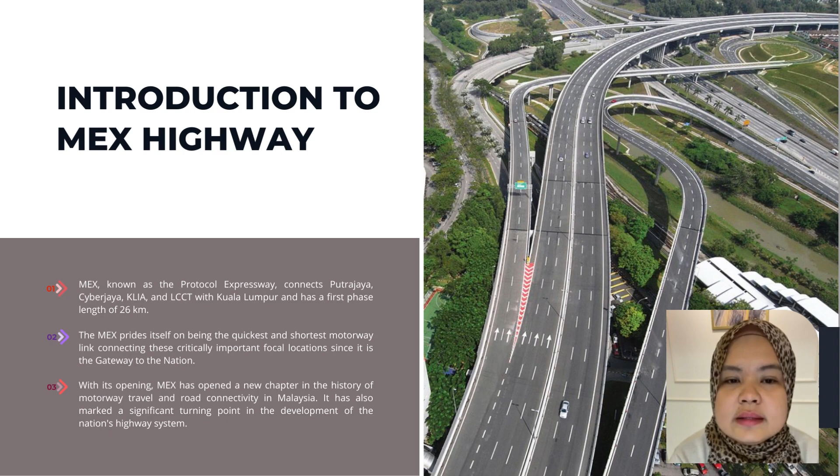The Maju Expressway MEX, formerly known as Kuala Lumpur to Putrajaya Expressway KLPE, and KL to KLIA Dedicated Expressway, is an expressway network in Klang Valley, Malaysia. The 26 km long expressway links the Kuala Lumpur city centre with the Kuala Lumpur International Airport KLIA in Sepang, Selangor. The expressway is a backbone of the Multimedia Super Corridor MSC area. The Kilometer Zero is located at Kampung Pandan Interchange, Kuala Lumpur, just outside the Tun Razak Exchange.

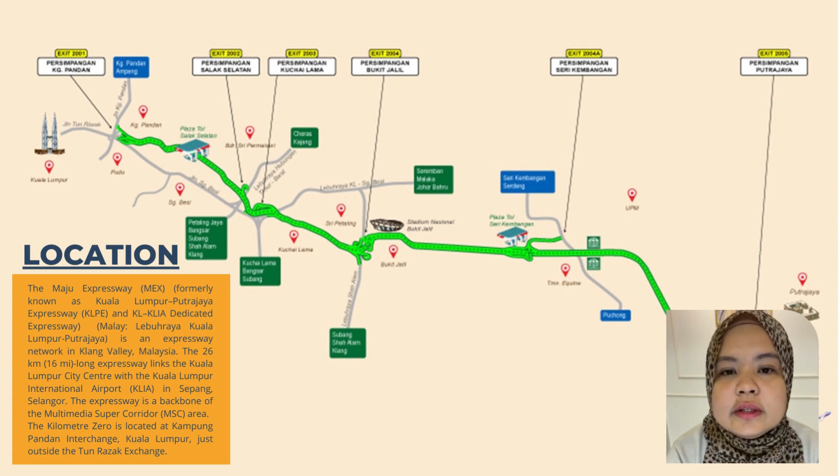Based on Edge report, EX1 Capital Berhad has announced the completion of its restructuring exercise via the issuance of Islamic Medium Term Notes MTN of up to RM 1.13 billion in nominal value.

Next, MEX is operated by Maju Expressway Sdn Berhad MESB, the concessionaire that has been awarded a 33-year concession to operate the dual carriageway commencing from 6 December 2004. Maju Expressway Sdn Berhad is a single-purpose company that has the concession given by the government to design, construct, maintain, operate, and manage the 26 km Maju Expressway.

MESB is a subsidiary of MEX Capital Berhad, which in turn is a wholly owned subsidiary company to Maju Holdings Sdn Berhad.

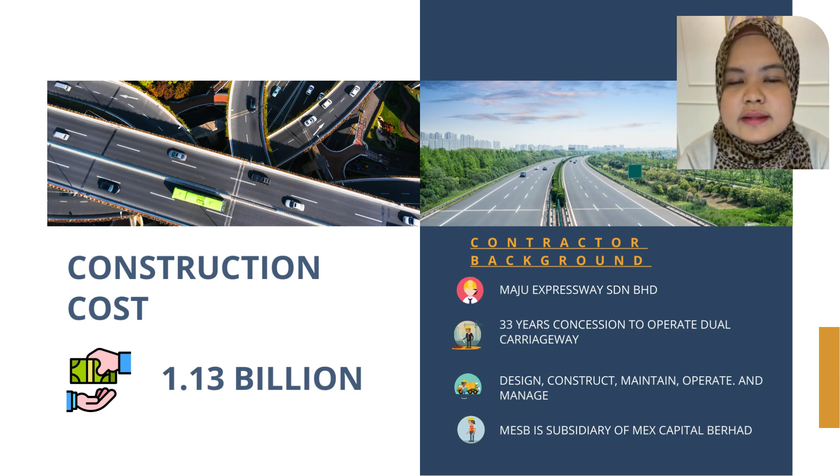Let us go first for the unique features constructed in MEX Highway. Firstly, there is a 120 meter steel box girder that was fabricated and launched onto the crosshead at Ramp 1 at Kampung Pandan roundabout to facilitate the mitigation of heavy traffic and to overcome the restricted space at the construction site.

Secondly, a 10 meter height bridge was constructed for crossing at the Bukit Jalil interchange over the Kesas Highway. Thirdly, the expressway has nearly 10 km of elevated viaducts over highly congested urban areas. Fourthly, in order to prevent vehicles from any precarious mishap, concrete parapets with an extended height of 2 meters were constructed in certain populated areas. And lastly, sound barriers were installed where the roads are along residential areas as an alternative to contain vehicle noise within the expressway.

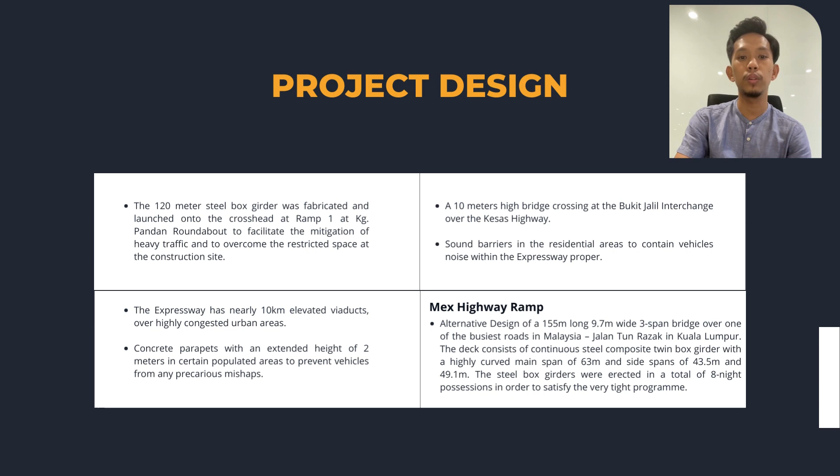Next, we will see how MEX construction technology reduces highway noise in built-up areas. The Maju Expressway MEX linking Kuala Lumpur with Putrajaya, as in many urban highways, cuts across highly built-up residential areas. This can potentially result in unacceptable noise to residents if left unaddressed. The design team, who were involved in the design development of the MEX Highway, found that there were several residential locations of concern.

One of the locations is where the highway runs over an existing local road in Seri Petaling. From noise modelling, the design team were able to design noise barriers to ensure that the MEX does not contribute to existing noise in the areas below. As such, noise from the MEX highway was rendered inaudible to residential houses or high-rise buildings located adjacent to the highway. Noise barriers can only be effective as long as there is no line of sight to the highway below.

In this instance, additional measures were implemented with low noise porous asphalt roads as compared to conventional bitumen, and certainly avoiding concrete pavements. Noise intrusion into bedrooms of affected apartments at different floors were also examined for traffic noise intrusion via the glazing.

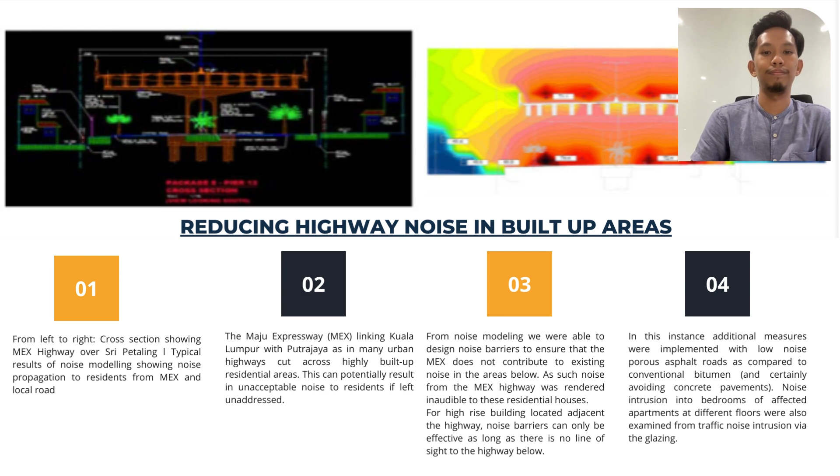Before I pass this session to my friend Akmal, let us see the project summary for MEX Highway.

The Lebuh Putrajaya KLIA MEX Highway is an 18-km 3-lane dual carriageway that will commence at Putrajaya Interchange and merge onto the existing Lebuh KLIA in Sepang. Putrajaya Interchange, with a trumpet configuration, will be designed for connectivity to the existing Putrajaya Toll Plaza.

From the outset, MESB intended that MEX should afford the highest level of security and comfort to users of the expressway. MESB has installed a host of safety features on the expressway, including a state-of-the-art traffic control and surveillance system (TCSS) that comprises vehicle detectors and closed-circuit television (CCTV) cameras.

The TCSS Center has a direct link to local emergency authorities to facilitate immediate assistance in the event of an emergency. It can also supply the media with the current status of traffic on MEX for immediate dissemination to the public. Other safety features are emergency telephones located every 2 km at both sides, and variable message signs along MEX.

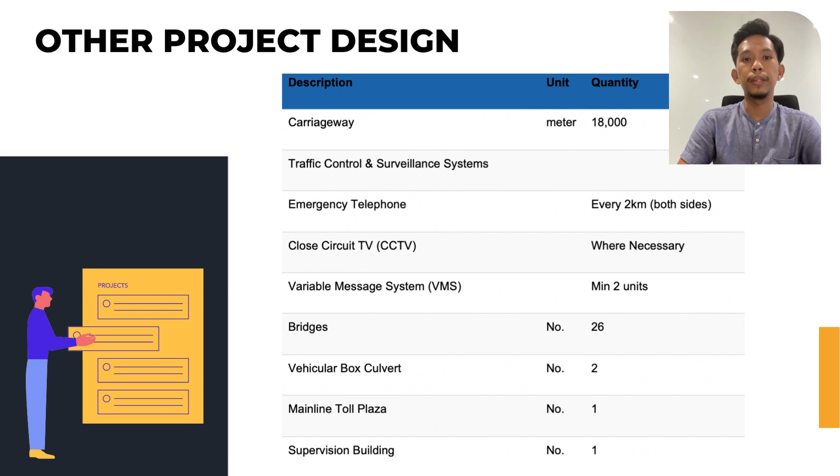I think that's all for my part, and I pass the presentation session to my friend Akmal. Thank you, Ruhaizi, on the explanation of project design.

Assalamualaikum. My name is Muhammad Akmal Beronsli. I would like to continue on the next topic, which is about construction technology used in the MEX Highway.

Firstly, the construction technology used is mechanized bridge construction. By using specialized erection equipment, the construction of beams to connect the highway is very crucial. In this project, precast beams are used and interlocked with precast columns.

Instead of using conventional methods of construction such as reinforcement bars, this project uses pre-stressed concrete, a system with benefits such as longer spans of concrete, reduced thickness of concrete, and faster construction method. This method obviously improves the structure and reduces the maintenance cost of the structure in the future.

Moving on to another construction technology, the movable scaffolding system, or MSS. This system eases the movement of concrete, which comes in segments, and is used to place the concrete on high columns, making it safer for the people working on site.

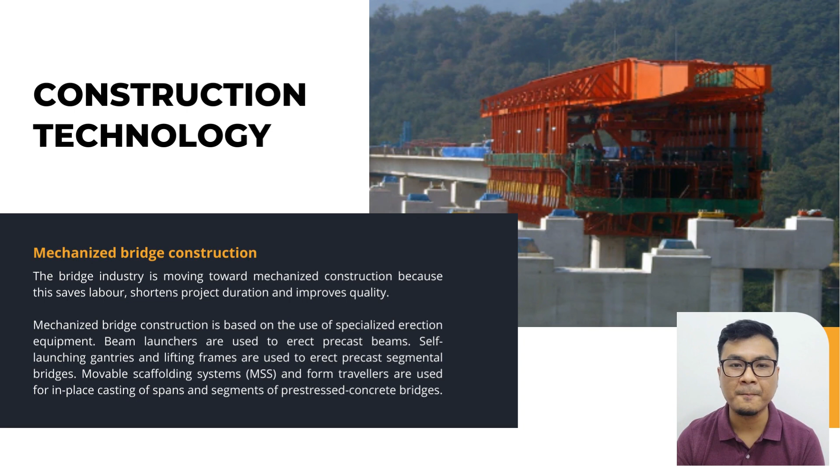This pre-stressed concrete is already molded somewhere else and delivered to site to complete with the post-tensioning system. The post-tensioning system uses a multi-jacking tensioner to strengthen the concrete, saving time for the site to continue the construction and complete the bridge construction.

For the next construction technology used in the MEX Highway, traffic sensors. Traffic sensors are used to simplify traffic problems and check the road condition. This technology is applicable especially on the exit roads located at Jalan Tun Razak and Bulatan Pandan.

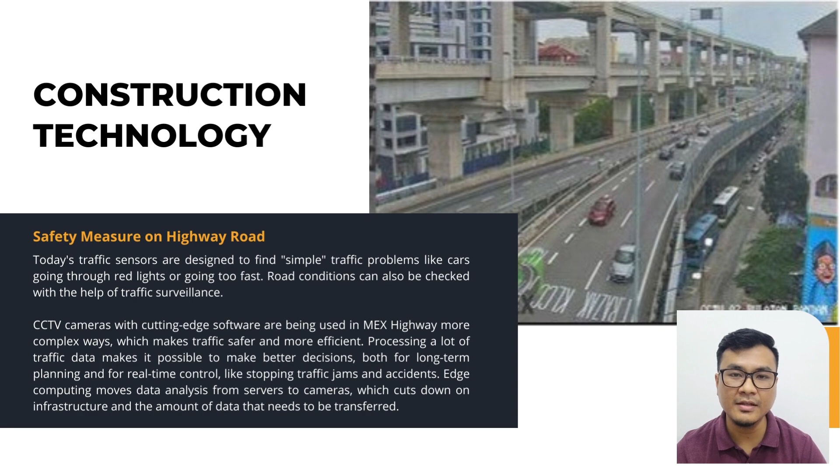Another thing is CCTV with updated software, also used to add safety measures on the MEX Highway. This allows the management team of the MEX Highway to analyze user data and avoid any accidents from occurring, with better decision-making earlier in the day.

Last but not least, the third major technology used in the construction of MEX Highway is the traffic control and surveillance system, or TCSS.

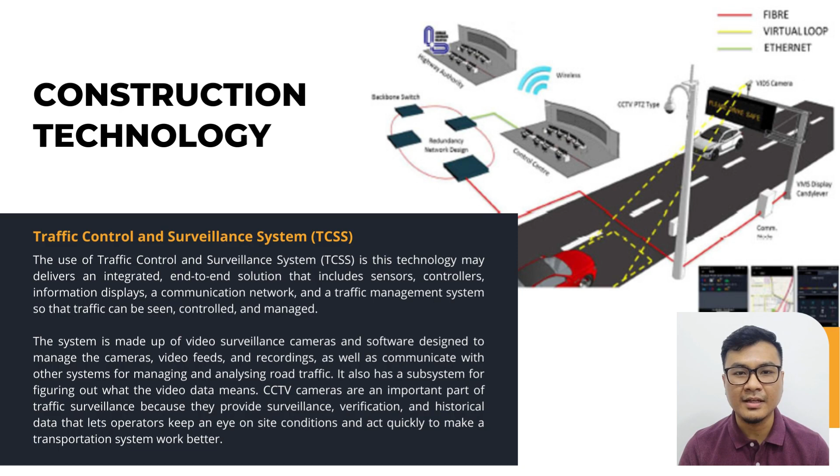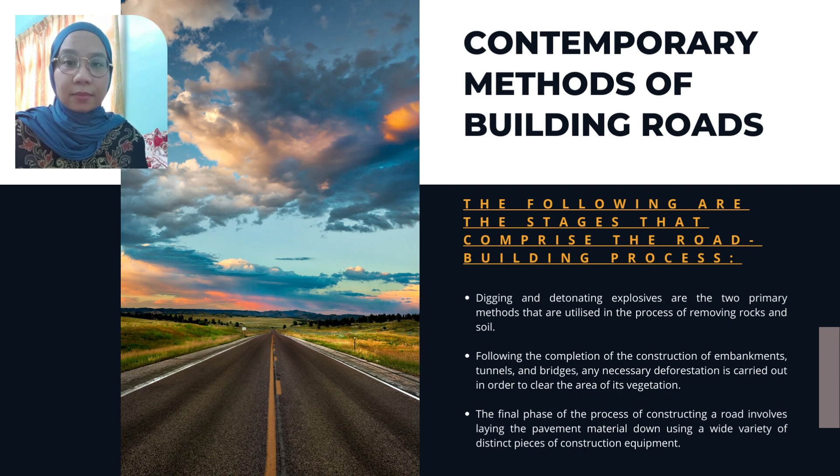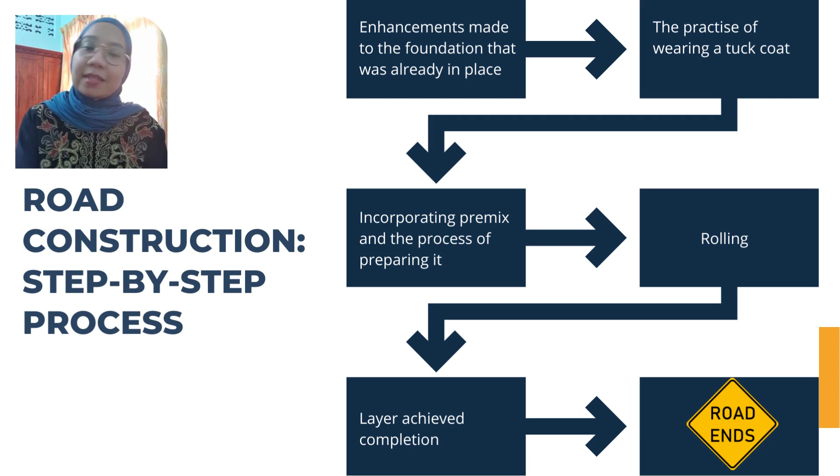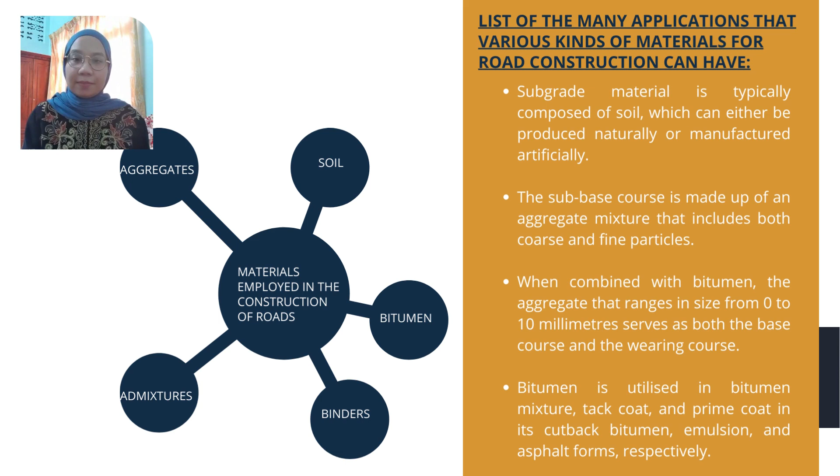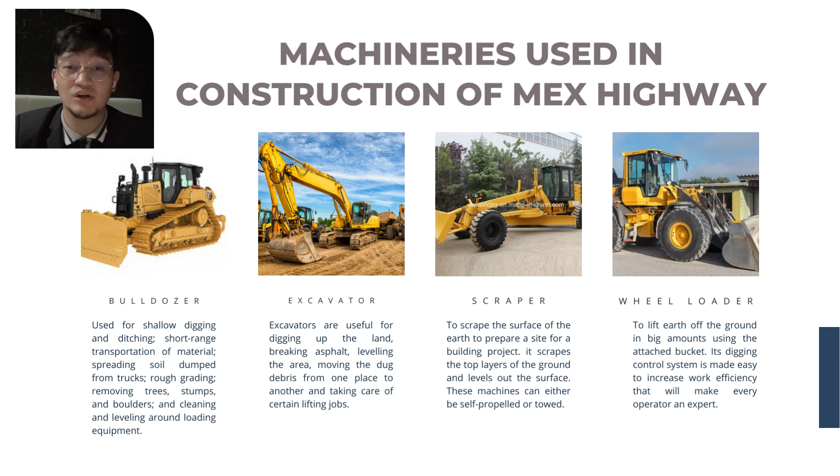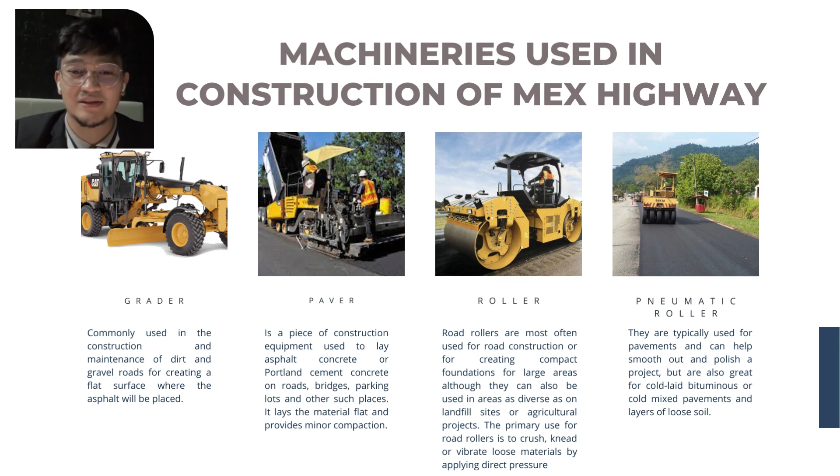In a nutshell, Maju Expressway provides the link between Middle Ring Road 1 (MRR1) and Middle Ring Road 2 (MRR2), thus relieving traffic congestion along this route. The expressway also provides free flow connection with other highways such as Besraya Highway, KL-Seremban Expressway, New Pantai Expressway, and Kesas Highway. Maju Expressway stimulates further property development in the region and accommodates ever-increasing economic activities, enhancing property value along its route. MEX Highway is also a very prestigious and large project that has been constructed in Malaysia.

The 120-meter steel box girder was fabricated and launched onto the crosshead of Ramp 1 at Kampung Pandan roundabout to facilitate the mitigation of heavy traffic and to overcome the restricted space at the construction site. The construction of MEX Highway also hired some of the most specialists in order to ensure the road is safe and accident-free to use. A lot of machinery was also used in this road construction.